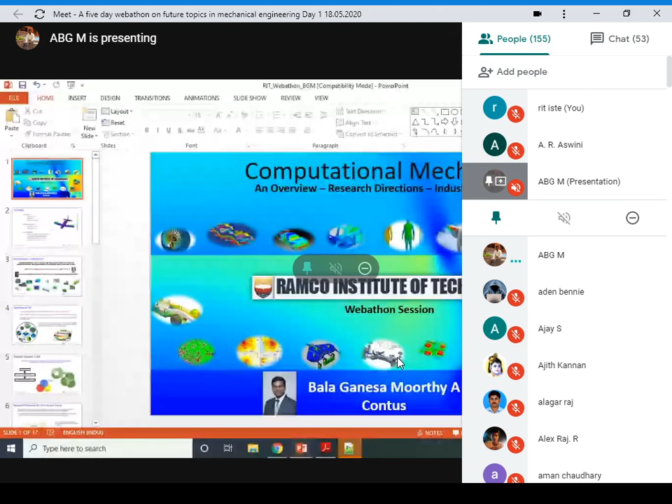Good afternoon, Bala Ganesa Moorthy sir. Can you hear me? Good afternoon, sir. Sir, kindly share your PPT now. Is it viewable? Yes sir. Is this okay for everyone? Fine, sir. Those who are not able to view the presentation, kindly pin ABG M. Okay, sir, everyone can see it. Shall we start, sir?

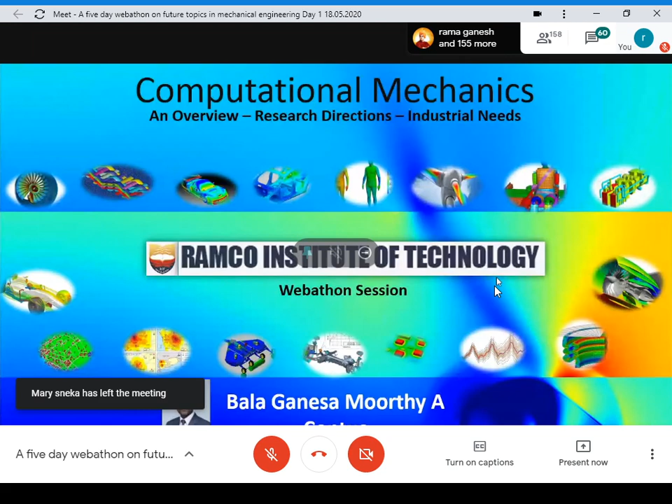Yes, sir. Good afternoon, everyone. After lunch, we are going to have a new session on computational mechanics. This time, I'm going to introduce our chief guest, Mr. A. Bala Ganesa Moorthy, Digital Engineering Services and Solutions, giving a lecture on computational mechanics as part of our 5-day Webathon on future topics in mechanical engineering.

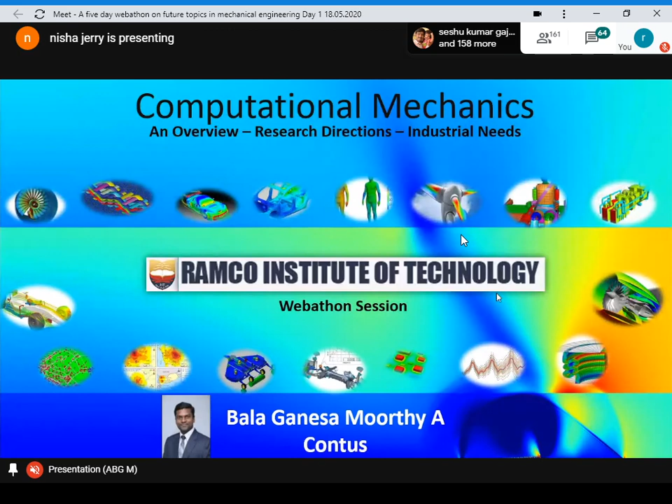I'm going to say something about the chief guest. Sir has 13-plus years of experience in software coding and application development. He has extensive knowledge in computational mechanics and CAD/CAE tools.

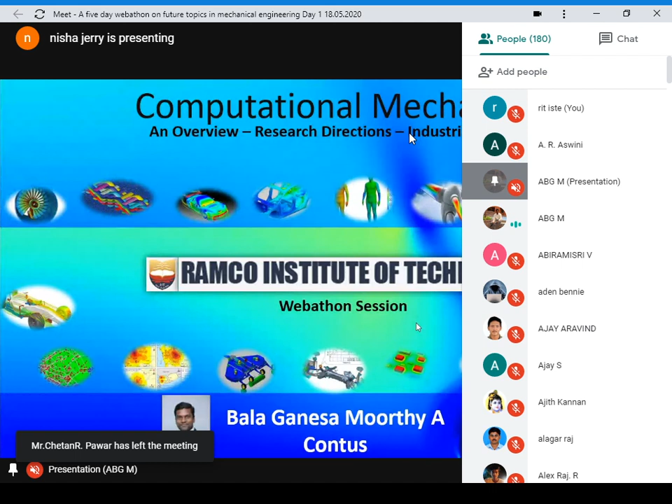So I have divided computational mechanics into 3 topics: an overview of computational mechanics, the research directions and interest in the current fields, how to elaborate the research so that we can have solid foundations in the computational mechanics fields. Then I want to give you the overall aspirations from the students' point of view, the industrial expectations for career aspirations, how students can start from their second and third year and during final year projects, and even continue research as an MS or MTech in global institutions or universities, and how they can go further into industrial needs.

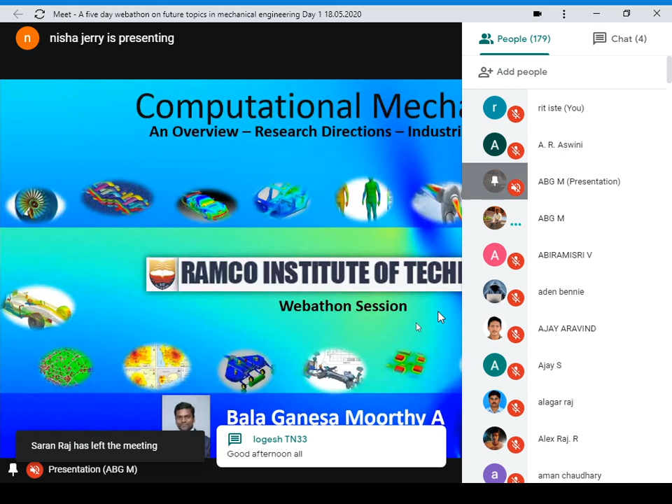So these are the major topics. I would like to cover them in subdivisions: the overview will have an introduction to computational mechanics and the branches of computational mechanics in industrial aspirations, then how the subjects are involved, since computational mechanics has been evolving for the last 3 decades. The second major topic is research directions, including both current trends and the future of computational mechanics, giving a brief introduction to its research interests.

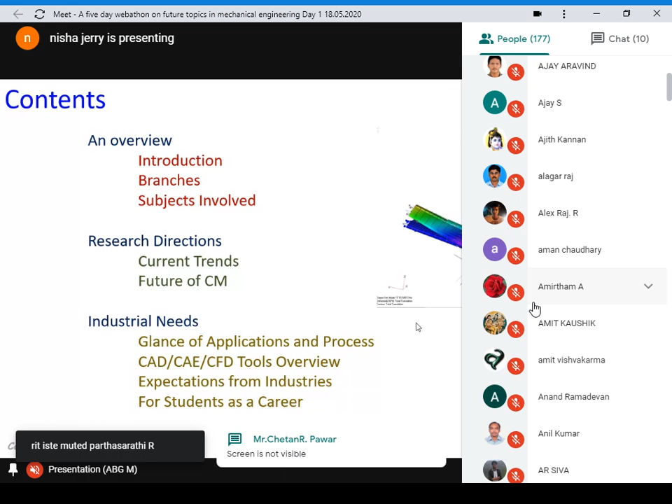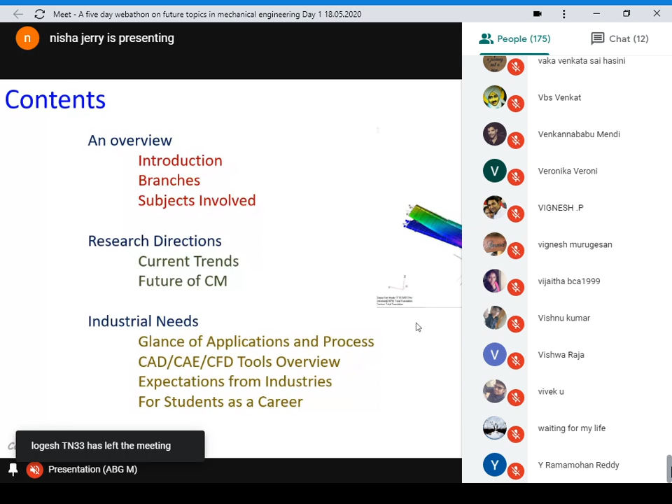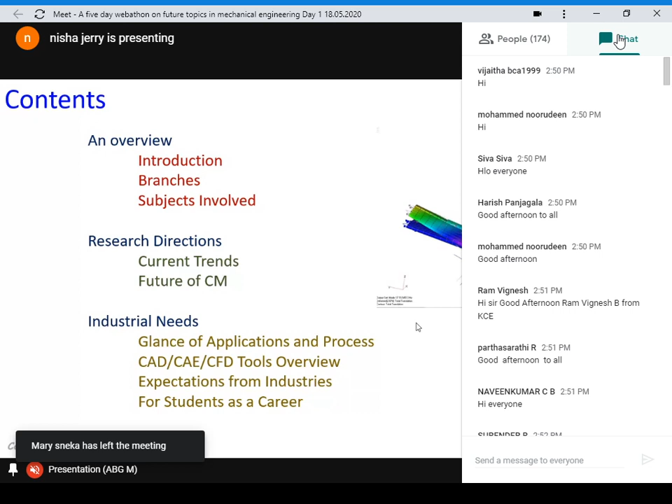Then I'll go into detail on industrial needs, how industrial applications are developed using computational mechanics, and what processes are involved. Then I'll give a detailed overview of design, computer aided engineering, and CFD, and the expectations from industries, so that the career for students would be fruitful and fulfill the needs of industries. And finally, a small intro on careers for students.

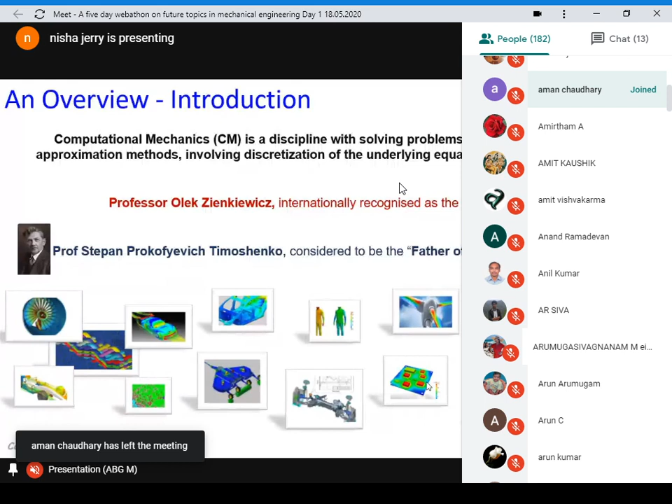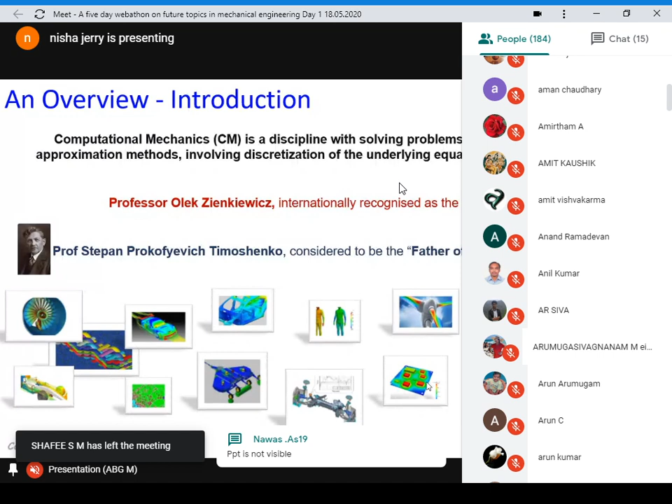Okay. If you see the overview of computational mechanics, we usually mention two people. One is Professor Zienkiewicz, and the other is Professor Timoshenko. These two people are considered the legends of computational mechanics, from whom we got a lot of computational mechanics solutions from the beginning, and we are still sticking to their principles for analyzing and creating new algorithms and equations, whether it is a continuum mechanics equation, biological systems, or probabilistic equations, we depend on them.

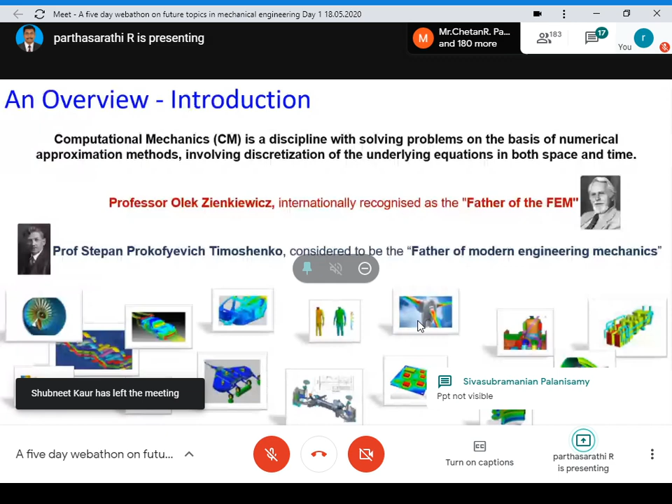Professor Zienkiewicz is called the father of finite element methods, which is fundamental for all computational mechanics problems. And Timoshenko is known as the king of plasticity and elasticity, and he's the father of modern engineering mechanics.

So if you see computational mechanics, it is a discipline comprising all kinds of fields: mathematics, physics, mechanics. So I can say computational mechanics is a discipline solving problems on the basis of numerical approximation methods. Please consider this: computational mechanics is approximation methods, and it is not the exact solution that we see in experimentation or in the current fields.

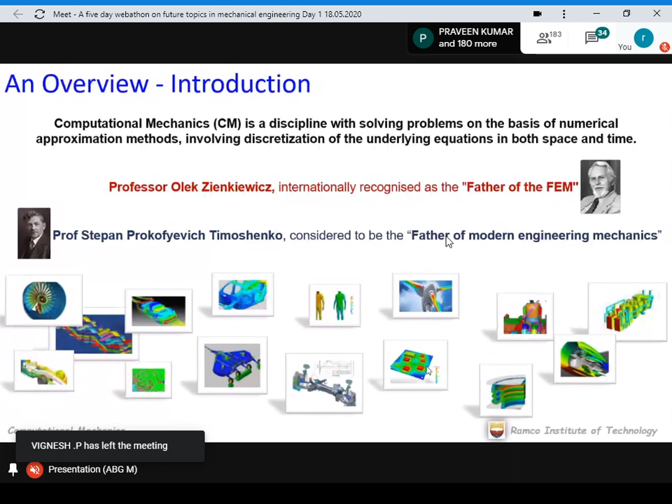So computational mechanics involves the discretization of some of the underlying equations. The equations could be integral, partial, or differential equations, or any combination of these, in the solution space, considering space and time. Computational mechanics can be divided into many branches based on their application, their theoretical aspects, and the solution methods followed.

And here I'm dividing computational mechanics into a few divisions based on the theoretical methods we follow. Computational mechanics has been a growing environment in the last 3 decades, and we are in the fourth decade. From the 1970s onward, people got involved in finite element methods and computational mechanics when they got huge computers with large amounts of RAM and

processing units. So they wanted to simulate experiments in the computer environment, and develop equations based on the needs: boundaries, forces, atmospheric temperatures, or whatever parameters we want to consider. So when they had enormous computational systems, they developed the computational mechanics field. In the last 30 to 40 years, it has been evolving like anything in the world.

And nowadays we have almost 500 plus computational tools helping us in design, solving computational problems, analysis, and presenting the computational methods as well as the results. Apart from this, universities with research and experimental methods also develop a lot of computational packages for daily use by students and researchers.

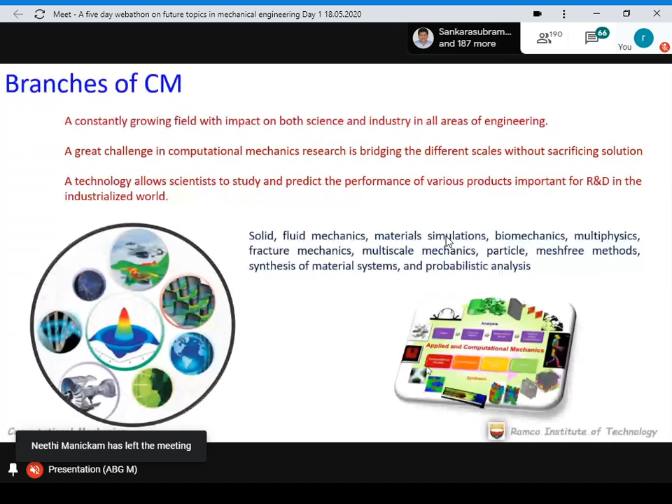So this technology provides predictive methods for the performance of various products, which are important for research and development in industrialization as well as for societal needs. So this gives the branches of computational mechanics. Now I'm moving to the subjects involved in computational mechanics.

As I mentioned in the earlier slides, this has evolved from physics and mathematics, and has been coupled with computer science, and hence computational mechanics has evolved in recent days. So it is a combination of physics, mechanics, mathematics, and computer science, and it encompasses applying numerical methods to various problems in science and engineering. And nowadays, it is giving a lot of exposure to research development as well.

I'm concentrating on the research directions of computational mechanics with the current trends. So, if you consider computational mechanics, it has evolved recently.

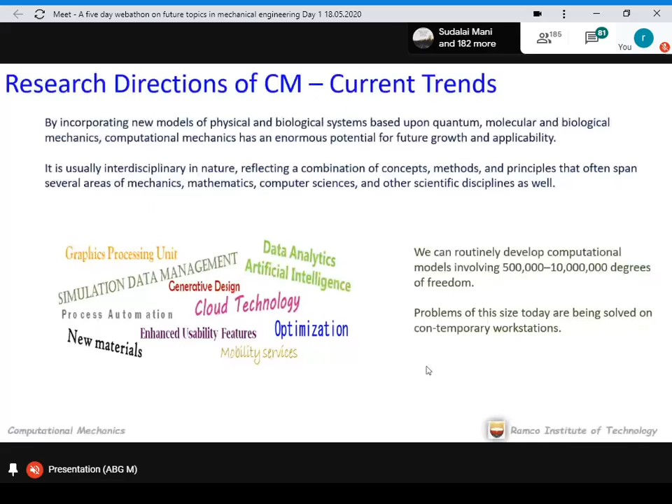Sir, sorry for the disturbance, sir. Prabhan sir, check your side, the PPT is not visible, sir. Prabhan sir, and Sogama sir. Sir, the PPT is visible to all the participants. If you are not able to see it, kindly pin it. All the participants are requested to pin the presenter screen, sir. Only then can you continuously see the screen. If any disturbances arrive, you will not be disturbed and can continue your learning. Okay, sir, okay, sir.

Okay, let me continue. In this slide, I'm giving you the current trends of computational mechanics, how it is evolving to address the current needs of industrial revolutions. The important point for implementing computational mechanics is identifying new models. It could be a physical model or a biological system based upon quantum mechanics, molecular science, or biological systems.

But anyway, the model is an essential one which needs to be incorporated or coupled with the concepts. It could be the physical concept, the mechanical concept, the probabilistic concept, or anything, so that we can incorporate that model. It is nothing but a mathematical model.

So the model could be interdisciplinary in nature, reflecting the combination of concepts and methods used in numerical methods. And finally, we have principles that often span several areas of mechanics, mathematics, and computer science to bring the solution.

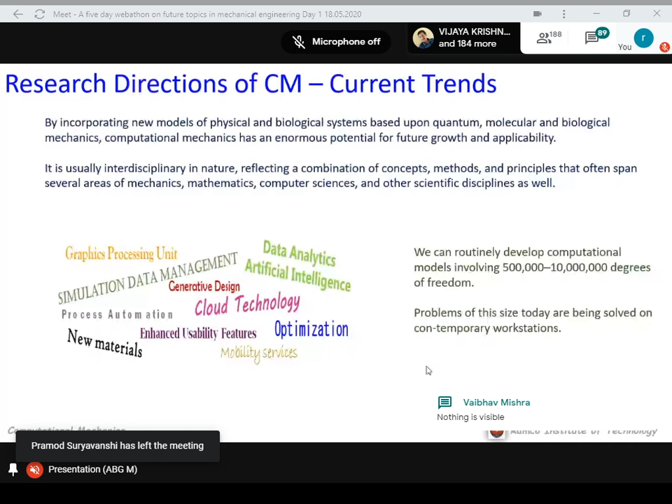So I'm touching mostly into the solid mechanics region because I'm involved with the engineering mechanics and structural mechanics field. I don't use any of the CFD tools in my current industrial needs, but I have some limited knowledge on that. Both CAE structural as well as fluidic interactions, FSI, fluid structural interactions, is also one of the fields for computational mechanics to evolve aerospace applications.

So if you see the computer aided engineering fields for structural applications, majorly we see two environments, one is aerospace as well as the automotive sector. Recently, I have been working with Ford, Caterpillar, Daimler, and other major automotive global giants. So we used to develop

methods as well as solutions for their CAE engineers and analysts, and we used to fine tune the results for their application and their requirements. So it is usually for various kinds like NVH, fatigue, durability, multi-body dynamics, full scale analysis, static analysis, nonlinear. So all these are built based on some commercial tools. Those commercial tools are available for researchers as well as students these days with limited boundaries. We can use those applications as an interest, as a research point.

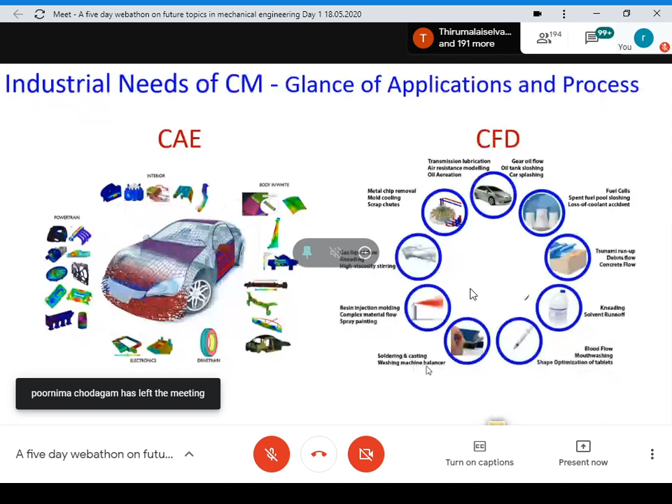So if you see the industrial needs, it is evolving from the physics basically. It is slowly going into the mathematical concepts. If you go into computational mechanics deeper, you need a lot of interdisciplinary areas. If you want to use any particular area, you can describe your areas of interest and the relevant physics, mechanics, and numerical concepts to be used.

When meshing the model, we usually go for 1D, 2D, and 3D. Those aspects are developed with the help of that particular commercial application. Between the tools, the naming or nomenclature of 1D, 2D, and 3D models changes, but the fundamental concepts do not change. They are constant.

Once we generate the mesh of the model from the CAD, we go for assigning the material properties to the design, because our design usually has a lot of components or assemblies. Each would have a different type of material, and that material would have different properties. By fine tuning the material properties and material selection, we can reach our solution easily.

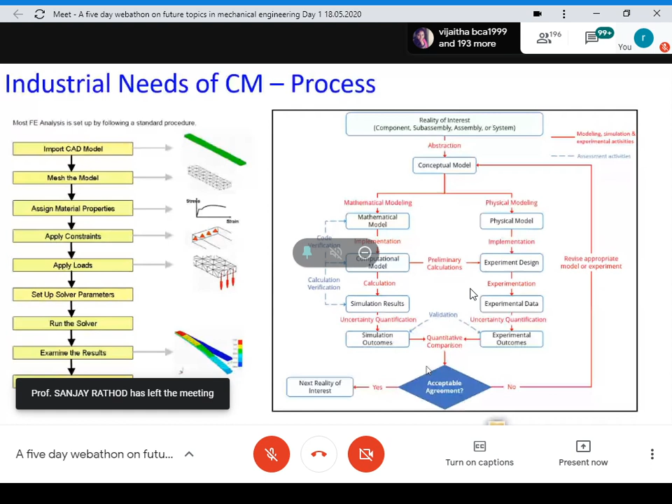Then we examine the results with the help of post-processing tools. There are any number of post-processing tools. They are coupled with pre-processing; ANSYS or Abaqus all have pre-processing, solver, and post-processing capabilities. Otherwise, we could go for separate post-processing tools. Based on the results evaluation, we can arrive at PPTs, hotspot evaluations, or animations. I'm just giving an overview of the process we usually follow from a CAE analysis perspective.

I hope this could be useful for bachelor level as well as master level students when they are simulating a practical environment using commercial applications. I hope your current curriculum gives this kind of exposure to the students.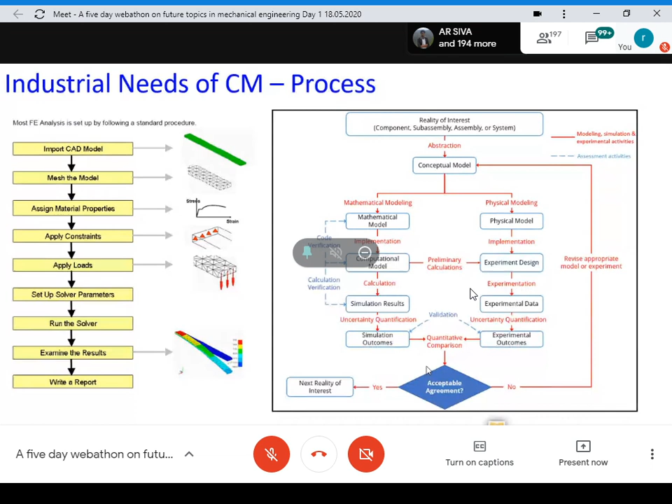As I mentioned, the process universally followed in finite element analysis has three major phases: the pre-processing phase, solution phase, and post-processing phase. The solution phase is also called the analysis phase. In the pre-processing phase, there are four major components: defining the type of elements, that is the meshing; defining the properties, that is assigning the material properties; model creation, that is the boundary conditions and applying the loads; and defining the mesh density, an additional parameter with which we can fine tune our results.

The post-processing method has three components. One is graphical output based on the solvers, and we can go for numerical output as well. We can define our upper bound and lower bound and the graphical environment, and then we can go for animated output for easy understanding of the deformation of the product or assembly.

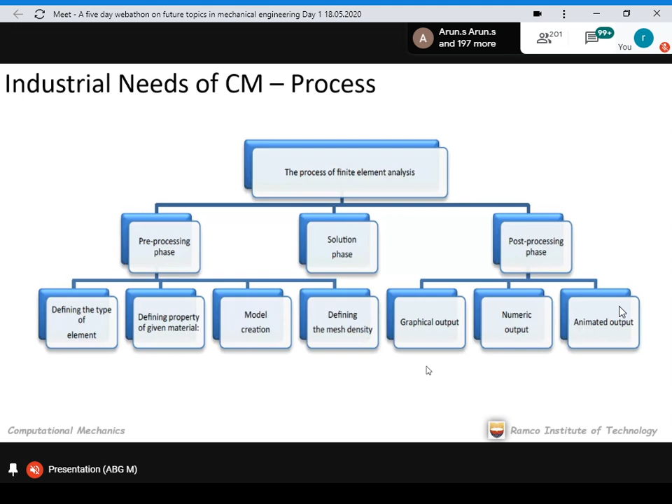And here I'm just giving a few of the major commercial applications used among research people and industry-wise. I also added one more software developed by our ISRO people. It is Indian made, the Make in India concept. So an Indian-made computational mechanics package that is called FEAST. It is a multi-physics tool, so we can use it for structural mechanics or structural applications or CFD or any electromagnetic or biological systems.

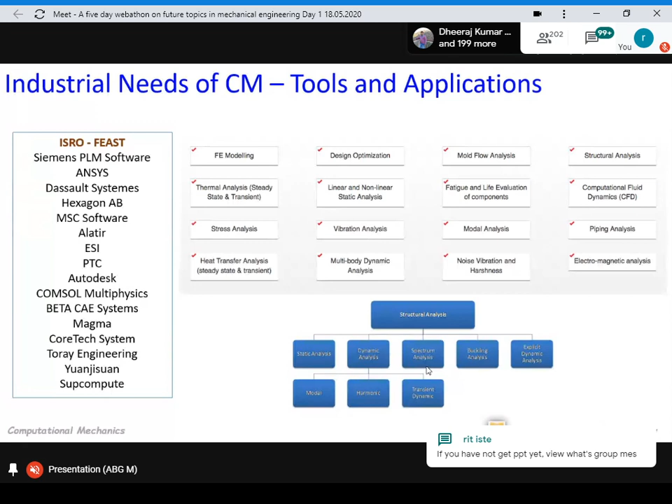Then Siemens has a PLM tool, with NX as well as solvers. ANSYS, a pre-post and solving coupled tool. Dassault Systèmes is a French company which has CATIA as well as Abaqus, called SIMULIA. MSC Software has Patran, Nastran, Marc, Mentor, the multibody dynamics tool Adams, a lot of things. Altair has more than 24 applications, and they are still evolving into new application development areas.

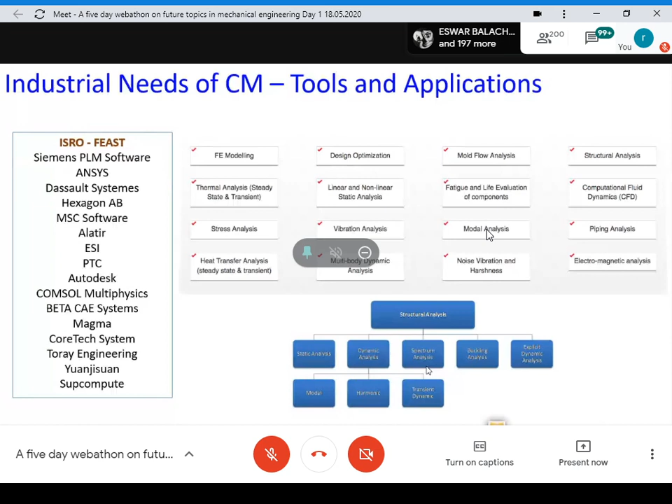And according to my knowledge, Altair, Dassault Systèmes, and ISRO FEAST are providing student versions for getting exposure to CAE tools and CAE applications, and they are also providing a lot of examples and walkthroughs. Altair is maintaining a university for students, and they can download almost 14-plus ebooks, and they can interact live with the university, that is, the industrial people, and they have a lot of webathon and hackathon kinds of programs, and they do have some system-level cloud-based CAE application development for students.

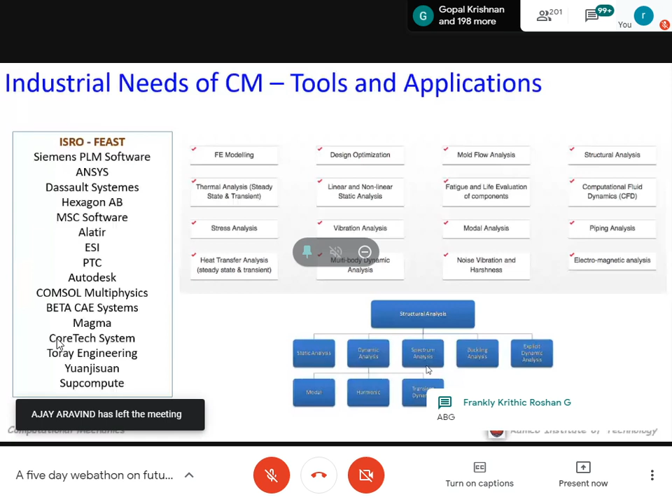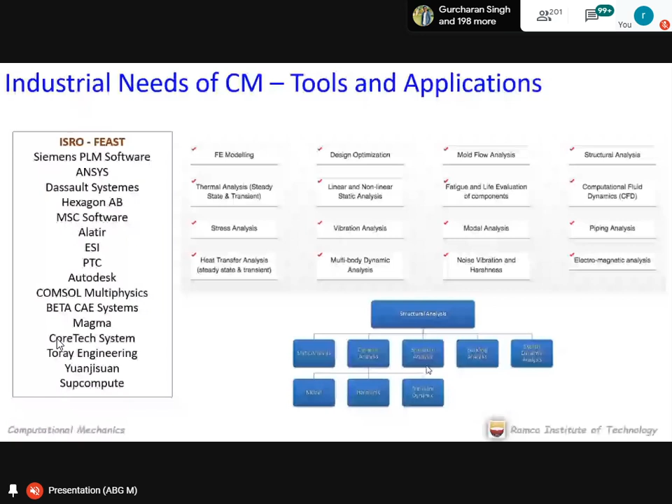So similarly for PTC Creo, ESI tools, COMSOL Multiphysics, BETA CAE ANSA and META post, or Toray Engineering. There are a lot of nonlinear analysis tools also available. So I suggest students have knowledge of static analysis with limited degrees of freedom and boundary methods. So I have given some of the analysis types which are used for industrial needs. If you take the automotive or aerospace sectors, these are all the analysis types, almost 80 to 85% used from an everyday point of view.

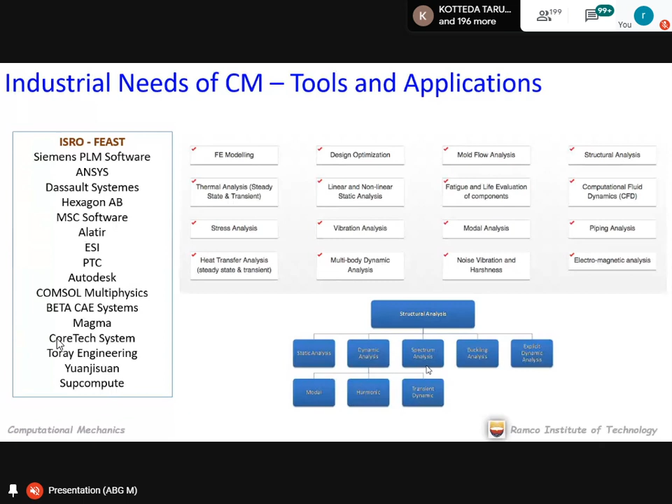If you see the automotive sector, it will take at least 5 to 7 years to bring a car into the market. If the person is working nowadays with the updated infrastructure of computational methods and computer infrastructure, it could be reduced to 5 years or maximum 4.5 years. That's all. So with the available infrastructure, available concepts and theoretical methods, we could arrive at a new car with a new design and all new components. It will take at least 4.5 years to 5 years.

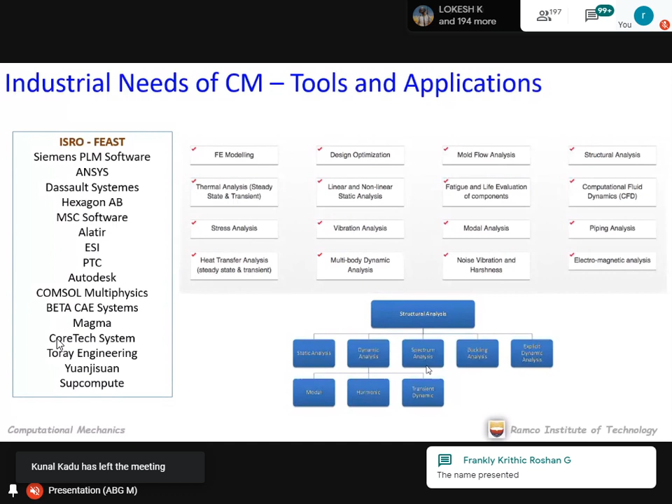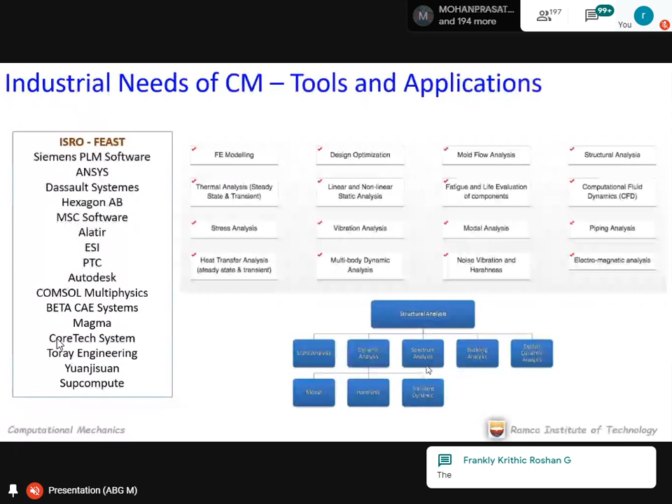So computational mechanics is a steady and slowly progressing environment, but it has a lot of definite aspirations in the fields, aerospace as well as the automotive field. If you take the aerospace field, it will take at least 15 years for evolving into a new product, new area, new product design and bringing it into the market. So if you want to develop your knowledge in computational mechanics, or if you want to build your career in computational mechanics, you have a solid foundation now and you have a definite future in the coming years.

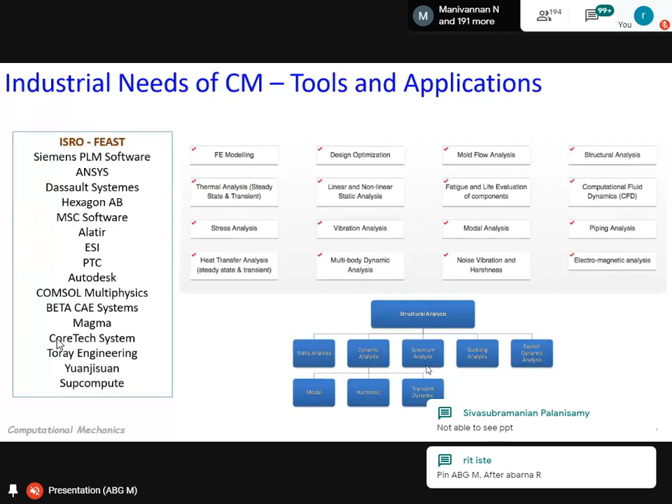But you have to define your areas of interest in any one of these analyses. Each and every analysis has a stream of knowledge to be gained. So based on your interest and based on your career aspiration, you can select any one of the tools, any one of the concepts, any one of the methods, following up the current fields. For students as a career, I suggest both CAD and CAE/CFD areas.

So the work nature would be, for the CAD environment, if you take Daimler, or Renault Nissan or Ford or Kia Motors or Hero or Honda, or in aerospace, General Electric or Rolls Royce or Bell Helicopters or Textron, or defense like DRDO, or spacecraft like ISRO or NASA, wherever you go, the work nature and application of computational mechanics would be similar because the fundamentals are the same. So we are going to apply the same procedures and methods in different environments.

So if you take a design environment, usually you go for design and drafting of components, new product development, new design, new conceptual design, rendering, and you can design your car end to end, from the front bonnet to the rear crash boxes. You can design all the components. Even for wire harnessing, Creo and CATIA provide a lot of applications, a lot of software packages.

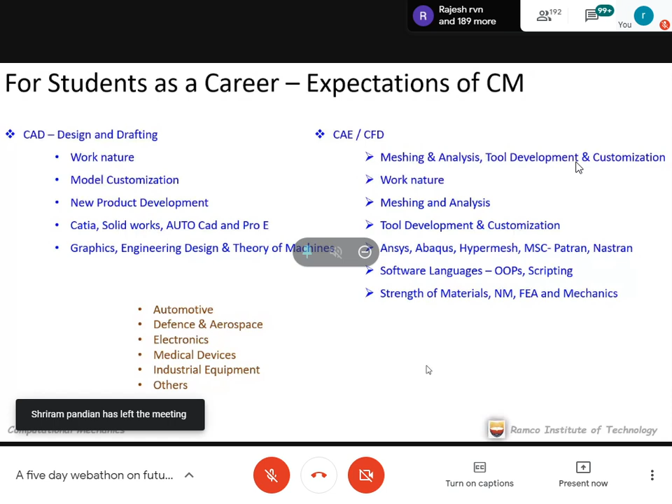Normally, after completing a bachelor degree, people are usually given meshing kind of jobs, because once you get fundamental knowledge on element, nodal level application, boundary condition definition, applying the load in the meshes, refining the mesh, and mesh free methods, then you will be promoted to an analyst level, where you can use computational mechanics more deeply, dive into multiple analysis tools, and compare the results based on the meshing as well as the boundary conditions.

There is one more area called tool development and customization. It is not only the front end area but also the back end area. You can develop the tools using software knowledge. Computer engineers or information technologists can develop the front end tools for the analysts and the CAE people. So my area of interest is this area, tool development and customization.

Even though I'm from mechanical engineering and MTech from engineering mechanics, I learned a lot of computational tools like C, C++, Python, scripting languages, Java, and Fortran especially, for creating computational mechanics applications. Here the application is the software package, ANSYS, Abaqus, HyperMesh kind of things. You can develop such application software and customize the features based on the analyst and

application environment need. The work nature would be, if you are going to be a mesher or an analyst, hands-on experience with the tools and packages, and you have to develop the tool knowledge and the domain skill set. It could be linear analysis, non-linear analysis, acoustic analysis, thermal analysis, NVH, or durability. And if you want to go for tool development, like application development or customization, you have to strongly develop your OOPS concepts as well as scripting knowledge.

Anyway, wherever you go, CAD or CAE or CFD, we need the fundamentals of strength of materials, numerical methods, mathematics, partial differential equations, integrations, matrices, vectors, finite element analysis, and obviously statics and dynamics. You can apply these concepts in automobile, defense and aerospace, electronics, medical devices, industrial equipment, power plants, oil and gas, architecture, spacecraft, whatever.

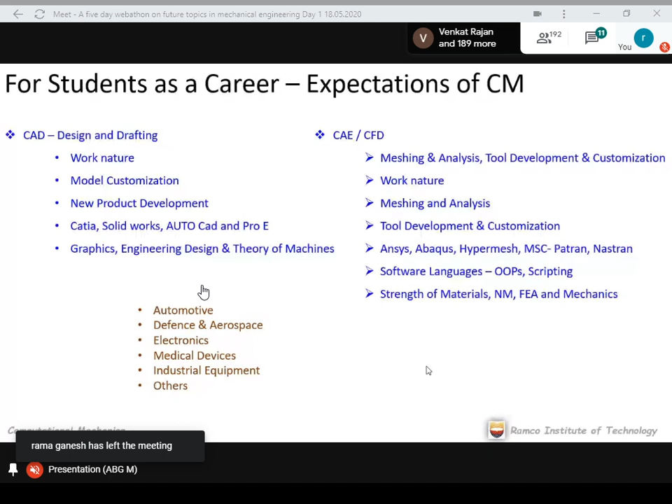There are n number of applications. Even for mobile creation, for designing the chip and the circuit design, we need computational mechanics. For impact analysis, when you drop a mobile from a certain height, how crashworthiness and impact analysis are applied. So it goes from household appliances to mobile appliances, as well as electromagnetic fields and the near field communication level.

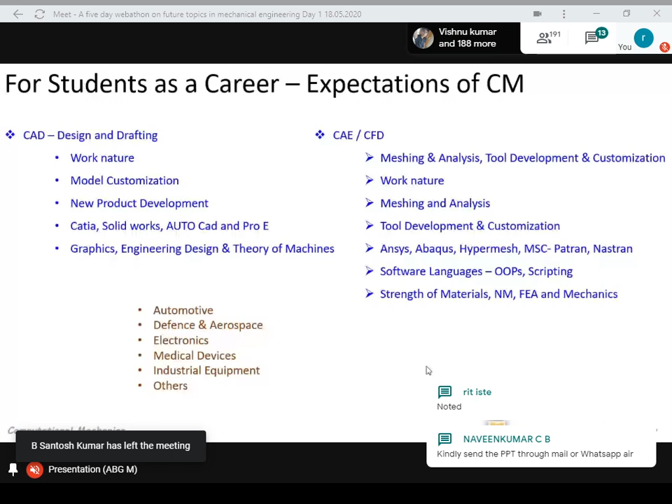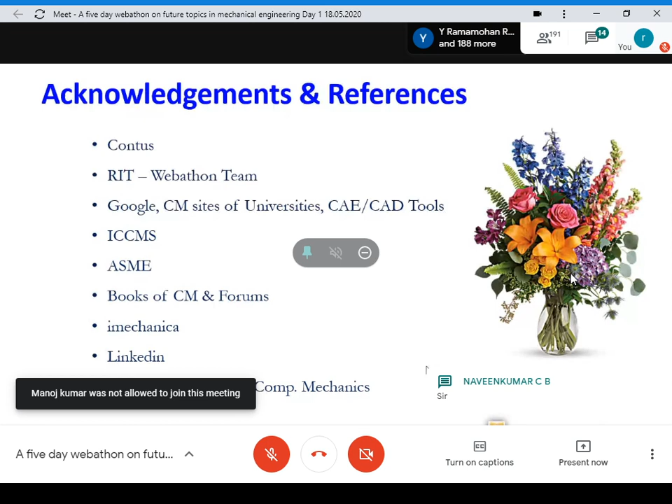I have collected a lot of my presentation material from Google, computational mechanics sites, universities, and CAE and CAD tools environments. ICCMS is one of the international conferences for computational mechanics and sciences. I have picked a few definitions and points from ASME articles. I referred to a few books of computational mechanics and forums. I suggest iMechanica, LinkedIn, and the Indian Association of Computational Mechanics, which are very good platforms where you can gain a lot of information on the current environment and futuristic aspects of computational mechanics.

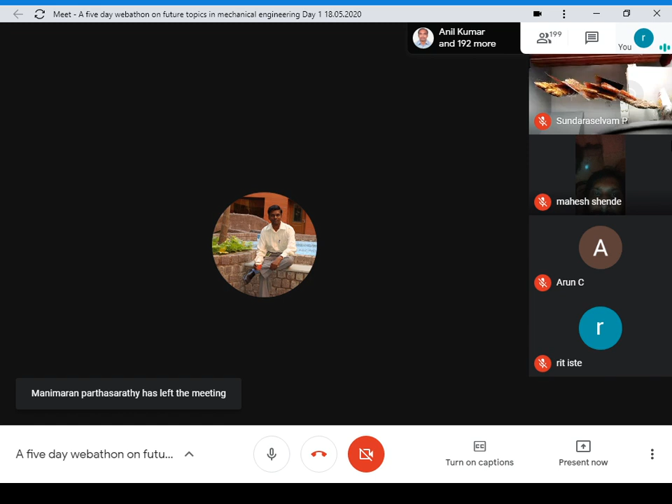Sir, another participant is asking about FICO software. FICO. Can I spell correctly? FICO. PICO.

FEKO. Okay. That is for electromagnetic fields, and I can suggest HFSS as well as a few softwares developed by Altair Engineering. HFSS is ANSYS, and Altair also has a few software for analyzing electromagnetic fields, antennas, and radio frequency simulations. FEKO is also one of the tools for electromagnetic field and radiation understanding. Yes, correct.

Sir, can you tell something about CFD? Many participants are asking whether CFD is the same as a CAE tool, what is the difference between CAE and CFD. Yeah, as I mentioned, CAE is structural mechanics, CFD is fluid dynamics, also a huge area of interest. Automotive and aerospace sectors cannot live without CFD or CAE structural mechanics.

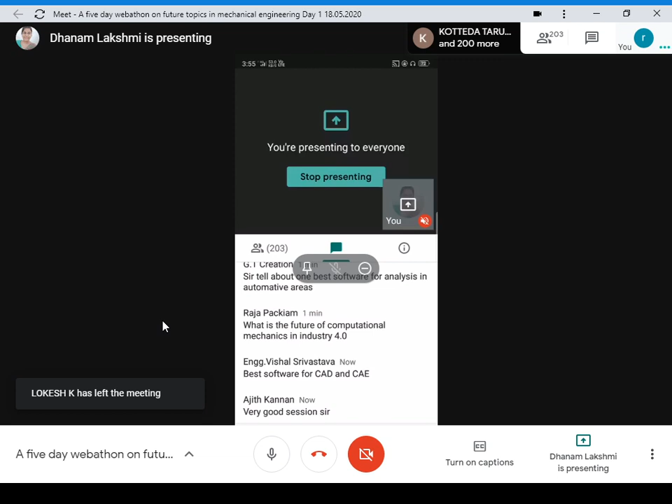Yes, I agree there are some limitations for using computational mechanics, but it constantly grows into different fields of Industry 4.0, and it gives a lot of automation perspectives without man-made development, application, customization. The customized tool itself can automate the environment and bring you the results.

In one of my projects, we developed fatigue analysis and NVH in an automated way, and we were able to achieve almost 60 to 75% reduction in time. A man-made analyst, to understand, implement, execute, and finally come to the solution, took 8 hours. We were able to complete it in an hour.

So that kind of automation technique is used in Industrial Revolution 4.0. For that, we usually go for scripting tools and scripting concepts. Yes, correct.